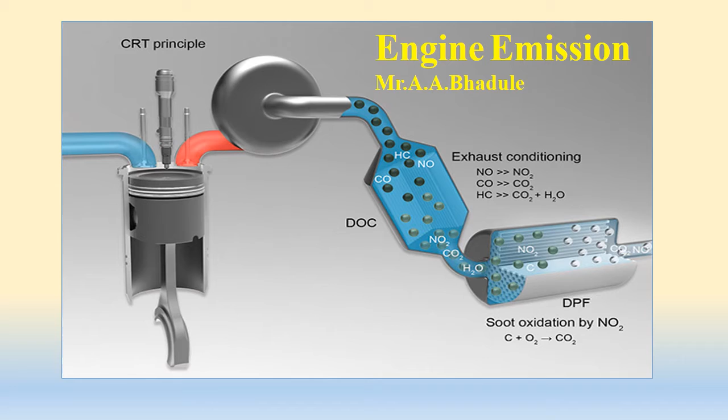In the previous two lectures we discussed and studied the alternative fuels, various alternative fuels and their suitability for SI engines as well as for CI engines. So now in the third lecture we are going to start the engine emission section, in which we are going to discuss various contents of exhaust emission, namely SI engine emission.

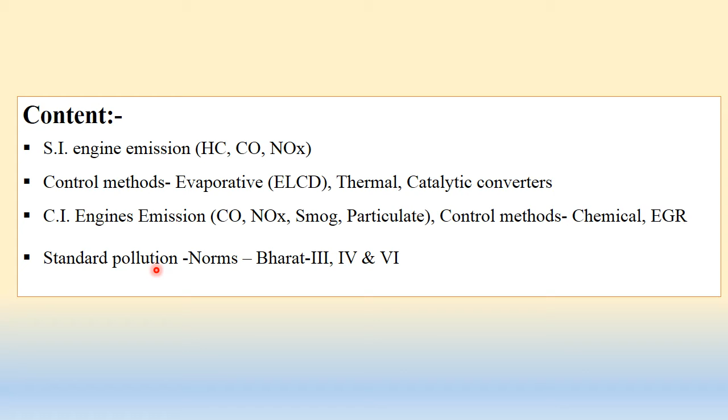It includes HC emission, CO emission and NOx: hydrocarbon emission, carbon monoxide emission, oxides of nitrogen. Then controlling methods: evaporative, thermal and catalytic converters. CI engine emissions: CO, NOx, smog, particulate. Control methods for CI engine: chemical and EGR. And standard pollution norms, Bharat stage. Let's start with the engine emissions.

As we know, the automobile plays an important role in the transport system all over the world, including India. The rise in civilization is closely related with the improvements in transportation. In the development of transport, internal combustion engines, both petrol and diesel, play important roles. Petrol engines have provided reliable small power units for personalized transport, and in this way revolutionized the living habits of people to a great extent.

Diesel engines have provided power units for transportation systems, that is buses and goods transportation like trucks. Indeed, petrol engine powered automobiles and diesel engine powered buses and trucks are symbols of our modern technological society. In recent times, internal combustion engine powered vehicles have come under heavy attack due to various problems created by them.

The most serious of these problems is air pollution. The main problem facing the developing countries is pollution, and engine pollution is important. India also faces the same severe problem of pollution in metropolitan cities like Delhi, Mumbai, Kolkata, Chennai, Kanpur.

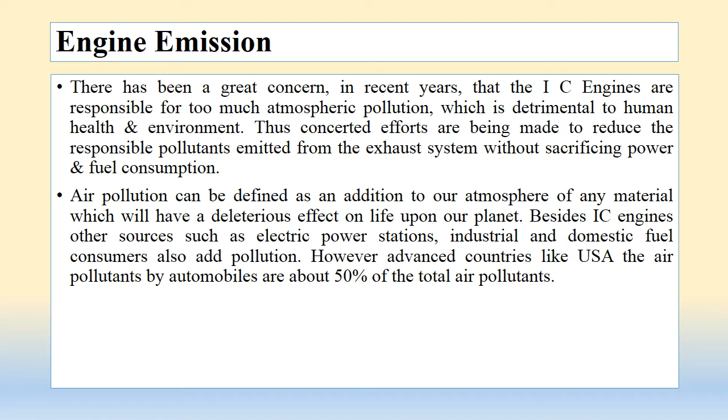Automobiles are not the only source of air pollution. Other sources such as electric power generating stations, industrial or domestic fuel consumption, refuse burning and industrial processing also contribute to environmental contamination. However, the percentage of air pollution from automobiles is much more than the others, because the number of vehicles is increasing day by day, and so automobile emissions multiply.

We will discuss these emissions from vehicles, that is from gasoline, LPG or diesel engines, because these are petroleum products containing hydrogen and carbon. Gasoline, LPG and diesel all contain hydrogen and carbon, and that is the main source of emissions like hydrocarbons, carbon monoxide and oxides of nitrogen.

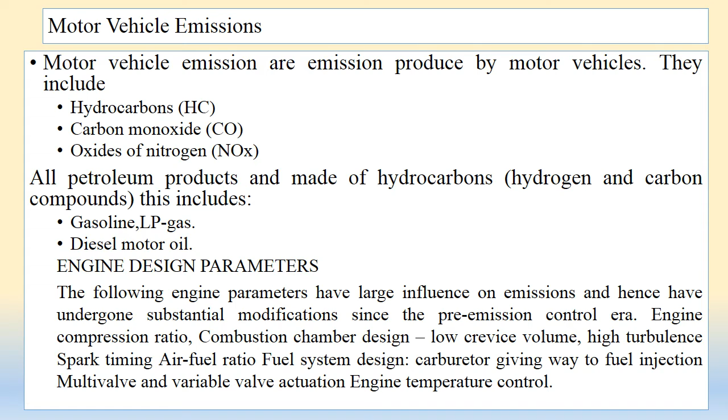Various engine design parameters are very important because they directly influence emissions. By proper design and modification of these parameters, one can control emissions. For example, compression ratio, air fuel ratio, fuel rating such as octane number or cetane number, combustion chamber design, turbulence, swirling motion, spark timing advance or retard, and fuel system design, meaning carburetor or fuel injection system design.

Evaporative loss from the fuel tank and carburetor is 15 to 25% of total hydrocarbon emission. Crankcase blowby is around 20 to 35% of hydrocarbons, and tailpipe exhaust results in 50 to 60% of hydrocarbons and almost all CO and NOx. CO and NOx are observed in the tailpipe only, but HC is observed from the fuel tank, carburetor and crankcase. Evaporative losses are direct losses of raw gasoline from the engine fuel system, that is the carburetor.

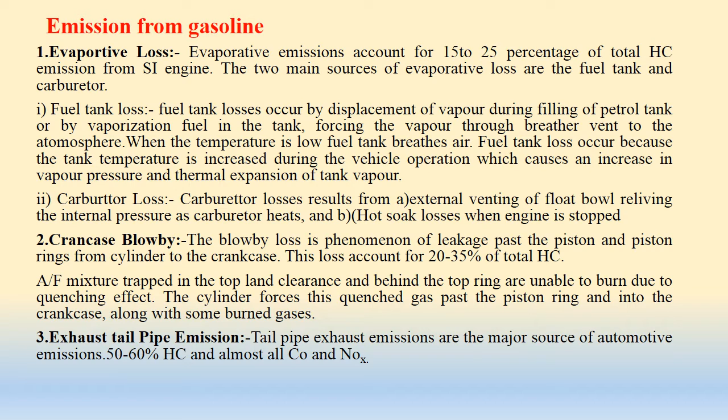First we will discuss the hydrocarbons. Hydrocarbons are produced because of incomplete fuel combustion or fuel evaporation. It is closely related to many design and operating variables, the engine design variables as well as operating variables.

Engine design variables are induction system design or combustion chamber design. Operating variables are air fuel ratio, speed, load. Maintenance is also an important factor for the hydrocarbon emission.

So the induction system determines the air fuel ratio of the engine. Maintenance will include piston ring wear, proper lubrication, proper cooling, and deposits which are likely to affect the air fuel ratio supplied to the engine cylinder. Design of combustion chamber is also very important.

In that, combustion portions which come in contact with the chamber walls are quenched and don't burn. Some of this quenched fuel mixture is forced out during the exhaust stroke, and because of the high local concentration of hydrocarbons in the mixture, it contributes to high HC exhaust from the engine. Also this quench area opposes spreading of flame and causes HC emissions.

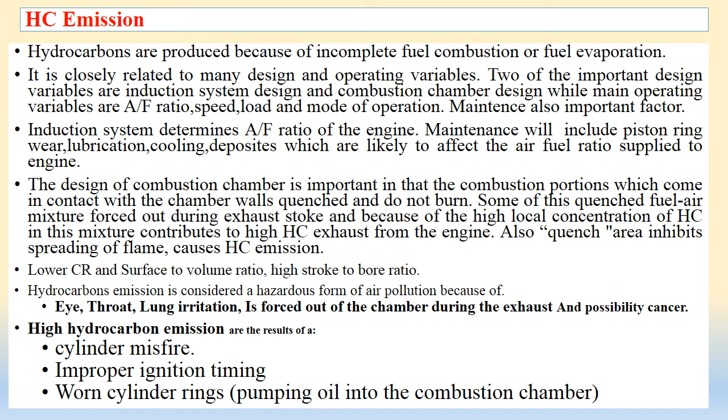Next is CO emissions. Carbon monoxide occurs only in engine exhaust. It is a product of incomplete combustion due to insufficient amount of air in the air fuel mixture or insufficient time in the cycle for completion of combustion. Theoretically, gasoline engine exhaust can be made free of CO by operating it at air fuel ratio greater than 16:1, meaning lean air fuel mixtures.

But CO is always present in exhaust even at lean mixtures, though the percentage is less. So to avoid CO emission, a lean mixture is to be used. The percentage of CO increases when the engine is idling, and it reaches a minimum during acceleration and normal cruising speed.

CO is extremely toxic, colorless, and odorless. CO is rapidly absorbed by the lungs and combines with hemoglobin in the blood, forming carboxyhemoglobin. It prevents blood cells from carrying oxygen to the body tissues, with adverse effect on the brain and nervous system as these have higher oxygen demand.

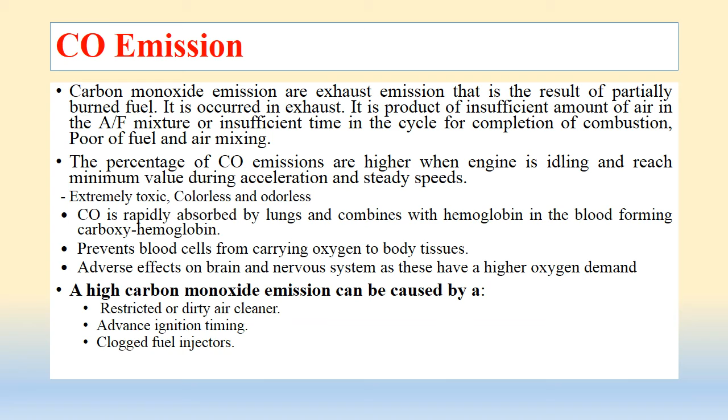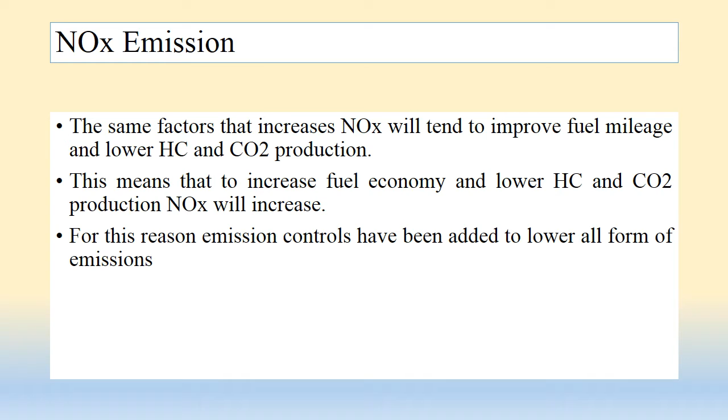Next is NOx emissions. The factors which increase NOx tend to improve the fuel mileage and lower HC and CO emissions. This means that to increase fuel economy and lower HC and CO, production of NOx will be increased. For this reason, emission controls have been added to lower all forms of emissions.

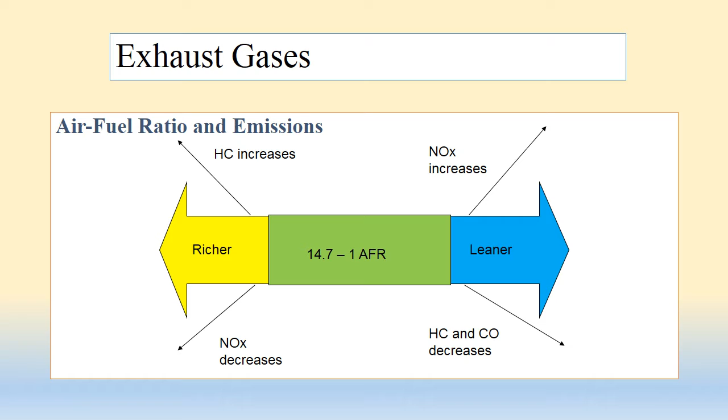If you see the figure, for a rich mixture hydrocarbon emission increases and NOx reduces. When the mixture is lean, HC and CO decrease and NOx increases. So factors favorable to decrease HC and CO are unfavorable for oxides of nitrogen, or vice versa.

Oxides of nitrogen, which also occur only in engine exhaust, are a combination of nitric oxide NO and nitrogen dioxide NO2. Nitrogen and oxygen react at relatively high temperature. Therefore, high temperature and availability of oxygen are the two main reasons for the formation of NOx. If temperature is high and available oxygen is sufficient, NOx will form inside the engine and you can observe it at the exhaust.

When a proper amount of oxygen is available at higher peak combustion temperature, the more is the NOx formation. Inside the engine cylinder it is NO, and in the atmosphere NO oxidizes to form nitrogen dioxide. The combination of HC and NOx in the presence of sunlight at certain atmospheric conditions produces photochemical smog.

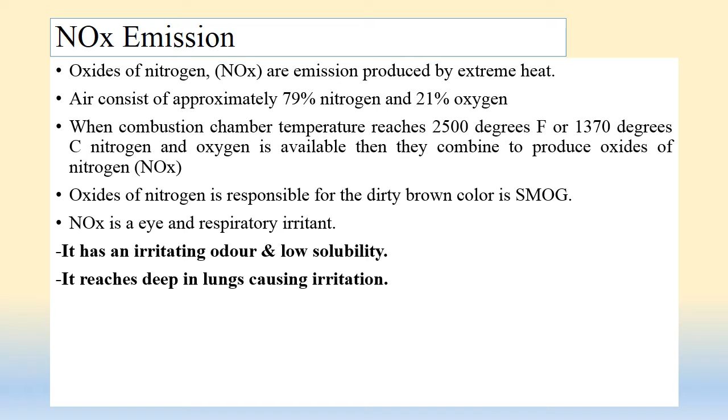NOx is an eye and respiratory irritant. It has an irritating odor and low solubility, reaches deep in the lungs causing irritation, and may produce mild irritation in the upper respiratory tract. In asthmatic persons it may cause asthmatic attacks. High compression ratio, lean air fuel mixture, and hotter running engines produce more NOx than earlier engines.

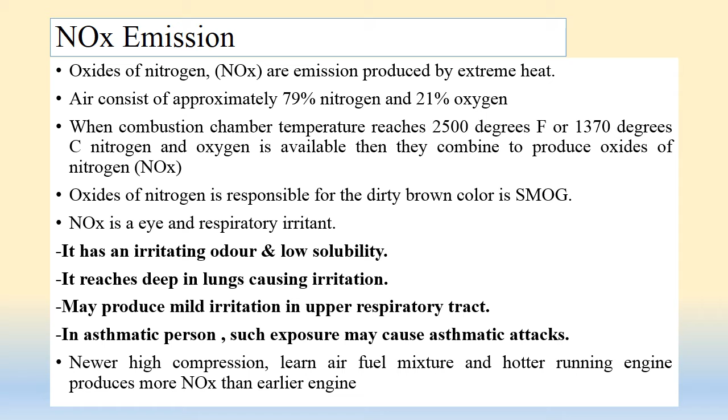So this is NOx emissions. Now let's discuss the CI emissions. As we know, in the SI engine combustion is homogeneous, whereas in the diesel engine combustion is heterogeneous.

Because the diesel fuel is injected into a cylinder filled with high temperature compressed air, emissions formed as a result of burning this heterogeneous air-fuel mixture depend on prevailing conditions, not only during the combustion but also during the expansion, especially prior to the exhaust valve opening. So the mixture preparation during the delay period, fuel ignition quality, residence times at different combustion temperatures, expansion duration and general engine design features play a very important role in emission formation for the CI engine.

Emissions from diesel engines are classified in the same categories as those from gasoline engines, but the level of emissions in these categories varies considerably compared to the gasoline engine. A sample of diesel exhaust may be free from smoke and odor and have no hydrocarbons, or it may be heavily smoke laden, highly odorous, with a heavy concentration of unburned hydrocarbons. So the emissions are the same categories, but they will be more in the case of the CI engine.

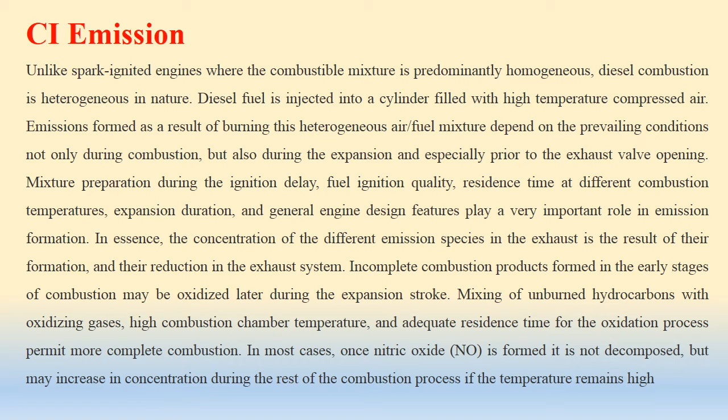So again it will have CO emission, HC emission and NOx emissions, and the same reasons are applicable for hydrocarbons, CO and oxides of nitrogen. Then along with HC, CO and NOx, it also causes exhaust smoke. Smoke is defined as a visible product of combustion due to poor combustion. It originates from the combustion due to a rich fuel-air mixture or a lean air-fuel mixture.

It will be in the form of soot. If soot finds sufficient oxygen, it will burn completely. If it does not burn in the combustion cycle, it will pass into the exhaust, and in sufficient quantity it will be visible to our eyes. Smoke is of two types: blue white smoke and black smoke. Blue white smoke is caused by liquid droplets of lubricating oil or fuel oil while starting from cold, due to lower surrounding temperature, and intermediate products of combustion don't burn. This results in bluish or white smoke when exhausted.